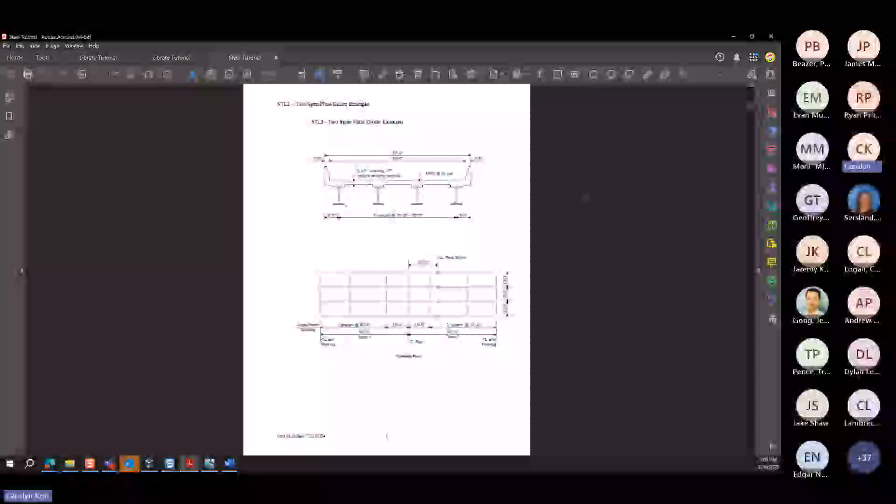Let me see. So I think that kind of covers the introduction here. Jeff, did you want to take over and talk about the libraries? Yeah, sure. Let me go ahead and share my screen.

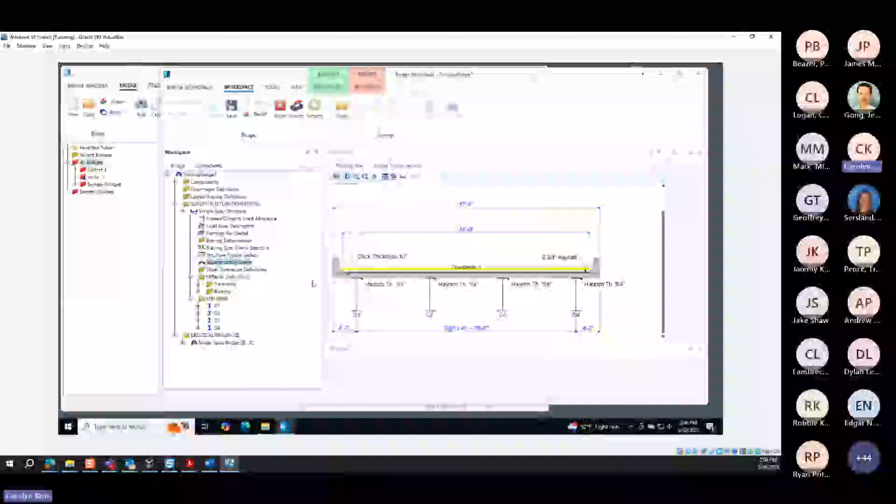So here we have stiffener definitions. Again, this is fairly straightforward, just defining stiffeners. Or if you have, let's say, prestress, you'll see shear reinforcements there. So there's our overall structure layout. So once we've got that part of it set up, this is where we'll come in and basically create the individual members.

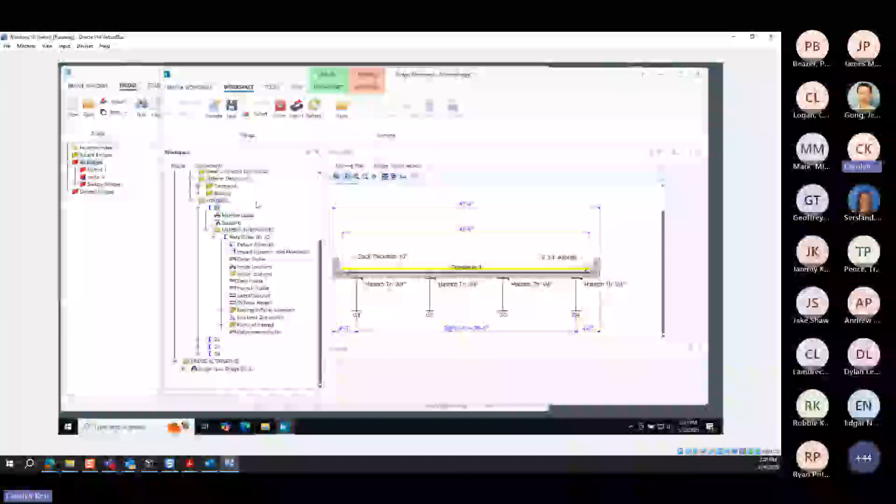Let me think here. I'll talk a little bit about what we've got here, and then I want to talk about member alternatives because that is a pretty important topic here. So when you go to create members, you can create different member alternatives.

So this G1, 2, 3, 4, these get set based on the number of girders that you've entered in this window. So when you're creating your superstructure and you set your number of girders here, that's what's going to determine how many girders show up further down the tree.

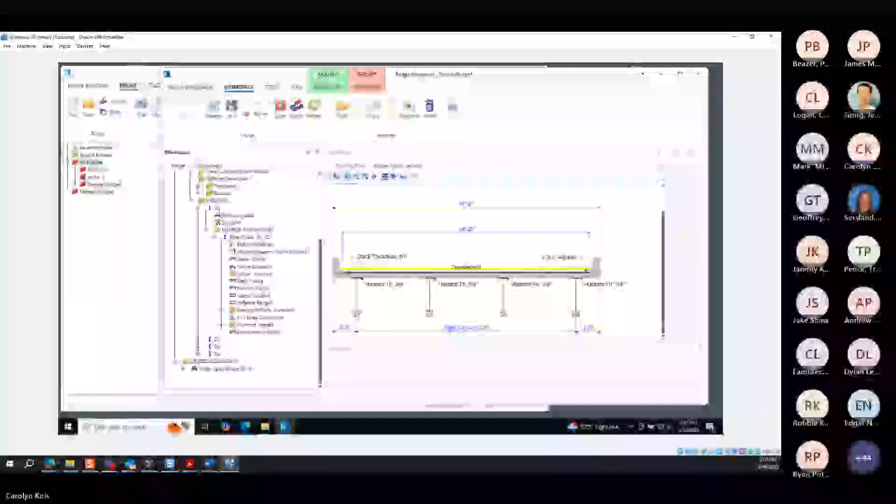So for each girder, we've got some loads here, and this will basically cover any kind of additional loads that aren't included in the components that we've already modeled. So for example, when we create the structure typical section here, the deck thickness that you enter here is used for the dead load. So that load is already going to be computed by the software.

Same with your appurtenances, parapets, wearing surface, all that kind of stuff. So if it's a component that you've entered here in your typical section, that will be used by the software to compute the dead loads on the structure.

This member loads here basically just allows you to enter any kind of additional or maybe unusual loads that aren't covered in the things that we've already defined here, or like the self weight of the girder, that we're going to enter down here. That also is used by the software to calculate the loads. So this would be for things like attached utilities, stay-in-place forms, other less common loads that aren't accounted for in the components that we're modeling.

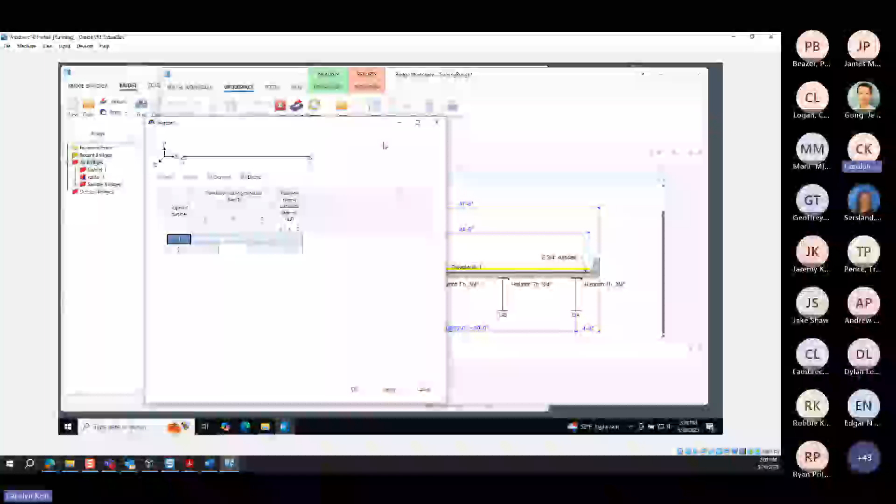And then here we've got support conditions. We've got the general or line girder supports that are used for a 2D finite element analysis versus 3D finite element analysis. We'll talk about this a little bit more when we get to analysis settings. But if you're working with a system model, a lot of times you're going to want to run a 2D finite element analysis. It's quick and it does the job for a lot of things. But you do have the option to run 3D analysis as well.

And if you do that, just make sure that your support conditions are set the way that you want them to be. A lot of bridges, especially a straight, normal bridge, are designed essentially as line girders. So when you create this 3D finite element model, support constraints that have a little bit too much fixity can cause some unusual results in a structure, depending on how the supports are set. So this is one of the things you'll want to look at if you are running a 3D analysis, to make sure that these support conditions are set the way that you intend them to be.

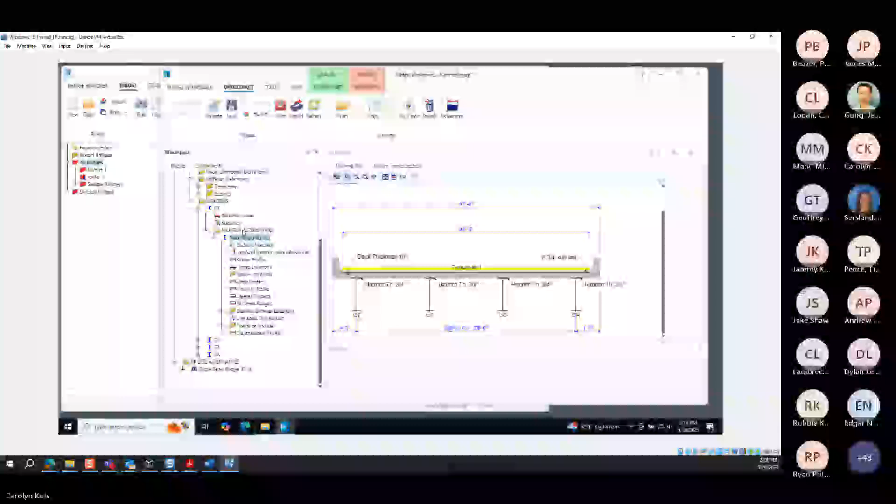Okay, so member alternatives. When we double click member alternatives, we have a bunch of different material types and girder shapes. Now, one thing that pretty much always tends to confuse people when they're getting familiar with the software is, what is the deal with member alternatives and bridge alternatives? Why do we need alternatives?

The short reason for this is basically that, if you're load rating a bridge, you're working with that one bridge. But this software is also used by departments of transportation and structure owners who might be working with thousands of bridges. If an agency has thousands of bridges in their inventory, and then they have 2, 3, 4 copies of different versions of structures for different bridges, that quickly becomes difficult to manage. So this allows you to keep different versions of things within that actual bridge.

So for example, when this bridge is new, let's say this girder gets modeled as the as-built girder. Everything's in good shape. There's no deterioration. Everything's the way it's supposed to be. Then, maybe years down the road, there's an inspection and they see some deterioration. Maybe there's a utility line attached to a girder, some other added loads, things like that. What the agency can do then is basically create a new alternative.

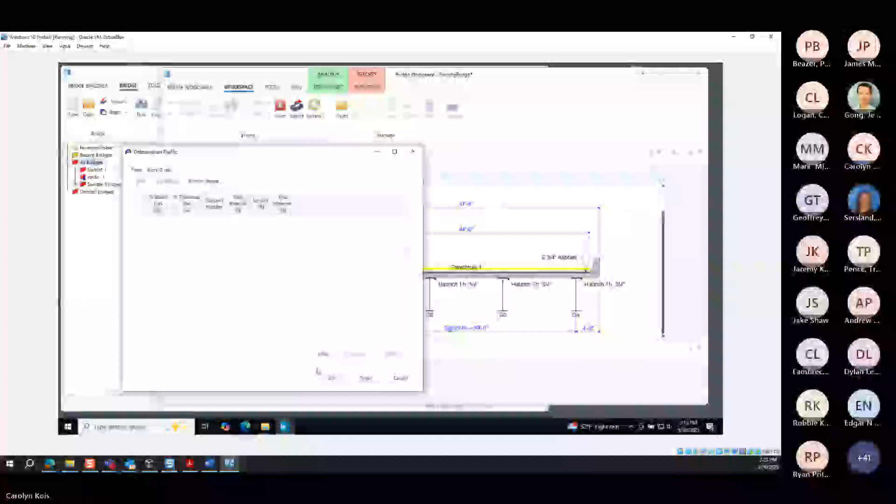And if I want to go in here, based on, let's say, the 2025 inspection, maybe there is some deterioration. Let's say we enter that here, say percent. All right. So this is basically the girder that we have now.

Now we've got two girders. So then what we want to do is go back into this girder, because remember the number of members that get set here comes from the superstructure definition. So this is like how many real girders are there in the bridge. There really are 4, even though there's 2 different versions of this one, right?

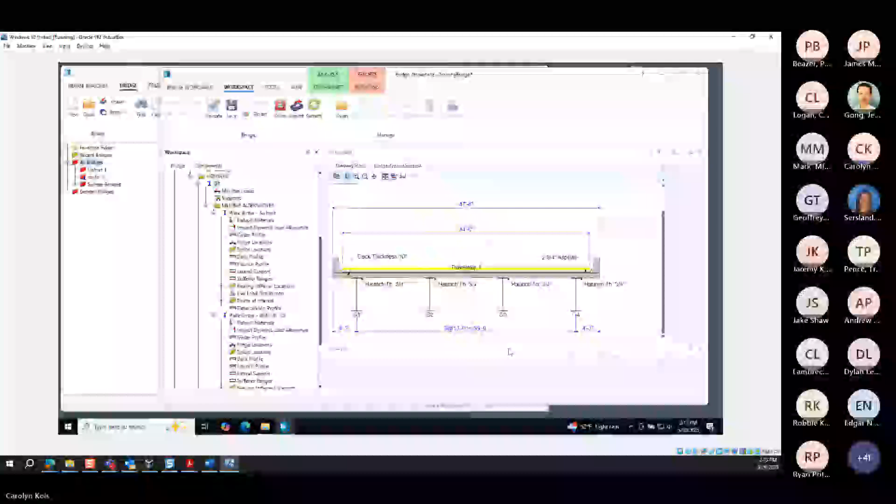So basically what we want to do is say, okay, this is the current one now. So we want to come in here, change this to existing and current, and then save this. The reason why this is important is when you run an analysis from, let's say, the superstructure definition level, it means that this girder is the one that's going to be included in that analysis, not this girder.

Same when you run a batch analysis from the Bridge Explorer. This is a pretty common thing, running batch analysis from the Bridge Explorer, if you have, let's say, a permit vehicle and you want to check, I don't know, these 3 bridges. I'm not gonna run an actual permit vehicle. Not a real permit vehicle, but that's okay. So this is gonna run this batch analysis from the Bridge Explorer.

Now, the way that this knows what to use within the bridge model are the elements that are set to existing and current. So that's why it is really the bridge alternative and member alternative. It can be a little counterintuitive at first, but it is super important, because when you're doing batch analysis and permit analysis, you want to make sure that the real, current version of what's out there in that bridge is marked as existing and current, to make sure that that's the member that gets evaluated.

So you'll see here after I ran this batch analysis, it's showing the structures and the components that were evaluated. And this shows that this plate girder 2025 is the one that was included. This is the one that I just modified in that bridge workspace and put that deterioration in. So if I'm running a permit truck right now, it's using the current, real version of that girder. So that is important.

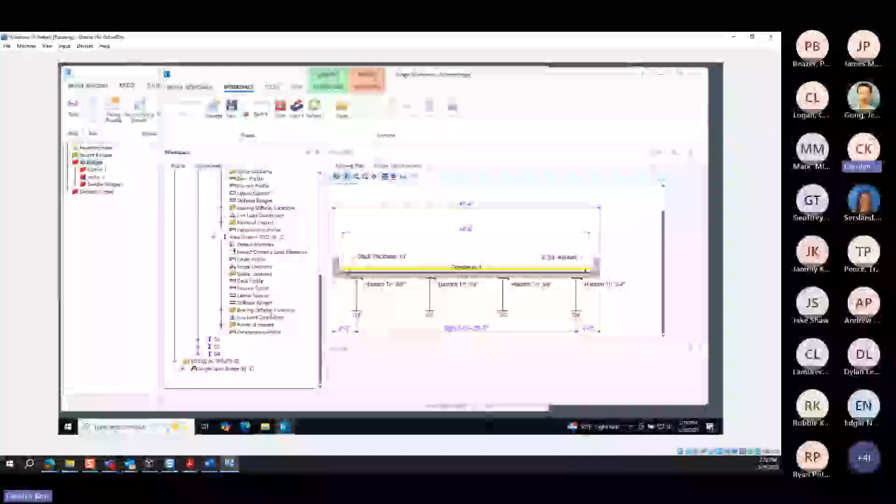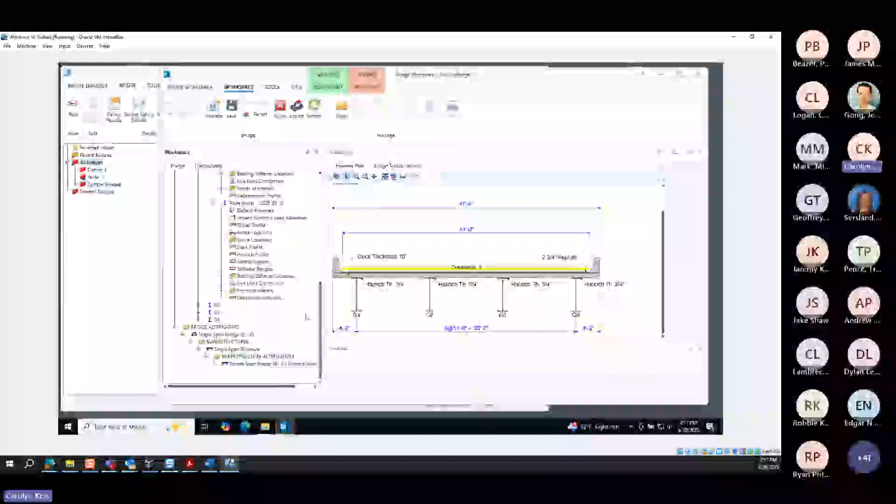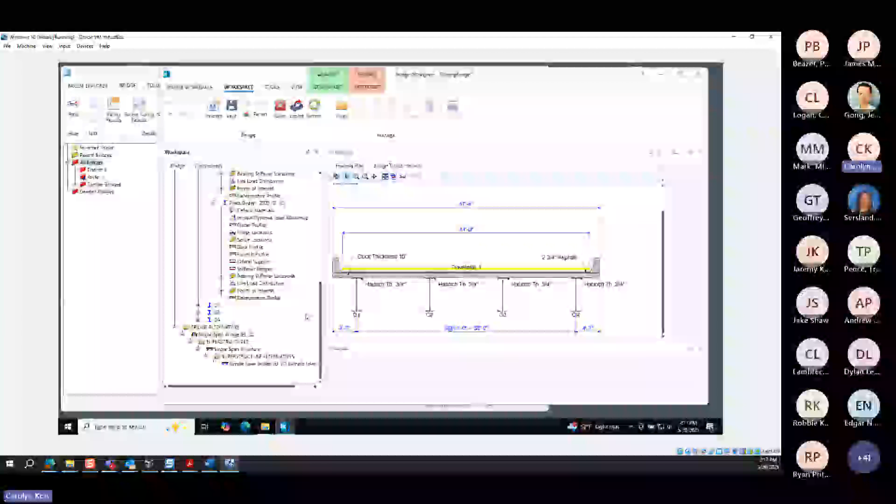There's a little bit more to talk about here with the actual plate girder and the girder itself. But since I'm on the topic of alternatives, I want to mention it's a similar idea for bridge alternatives. If you're attending the next couple of virtual trainings, we will be touching back on the concept of bridge alternatives and member alternatives a few times, because almost everyone who starts working with the software finds this a little counterintuitive at first, but it is a really powerful, valuable feature to structure owners.

Just like you can have a couple of different member alternatives, but there's really only one real existing current one, it's the same thing with bridge alternatives. So under superstructure definitions, I can have another superstructure definition. Let's say I was looking at a structure where I was considering a structure replacement or something like that.

You can have a couple of different bridges within that superstructure. But regardless of how many are here, even if you only have one, you will need to come in and create this bridge alternative. And this is what tells the software what should actually be included when you're doing that analysis. And so this is where you'll see here, this is showing existing and current superstructure. And so that's this simple span structure here.

So for example, let's say a DOT was looking at a roadway repaving and you want to check if adding a couple of inches of wearing surface is going to end up restricting your bridge. Maybe you create a new superstructure definition to evaluate that, but you don't want that to be the structure that's used for permitting because it's not currently out there yet. You can still have that alternative in here because it's something that you want to check and look at, but it's not the one that's saved to the bridge alternative, meaning that it won't be the one that's used when you're running a permit analysis or something like that.

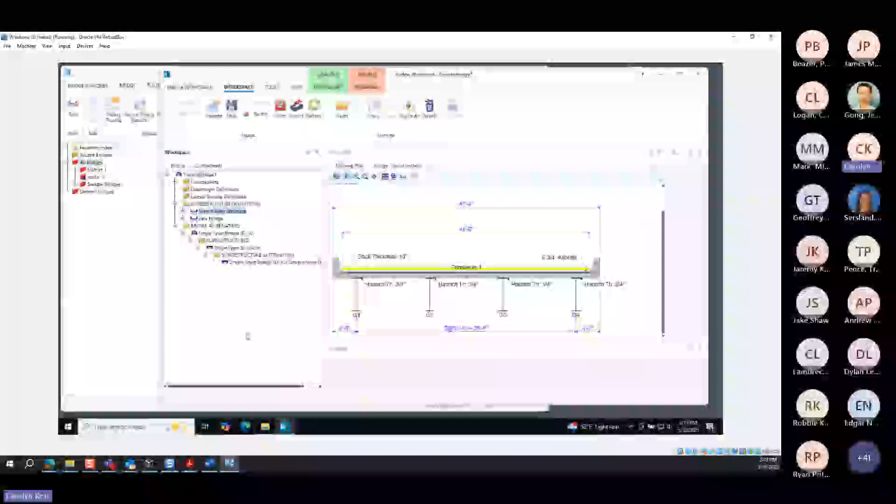So again, I know it's kind of quickly going over a lot of information there. We will be revisiting that through the next couple of training courses as well. Let's see here. Just to briefly go back to a few more things about the actual member alternatives. So once you've created a member alternative here, I'm going to switch this back.

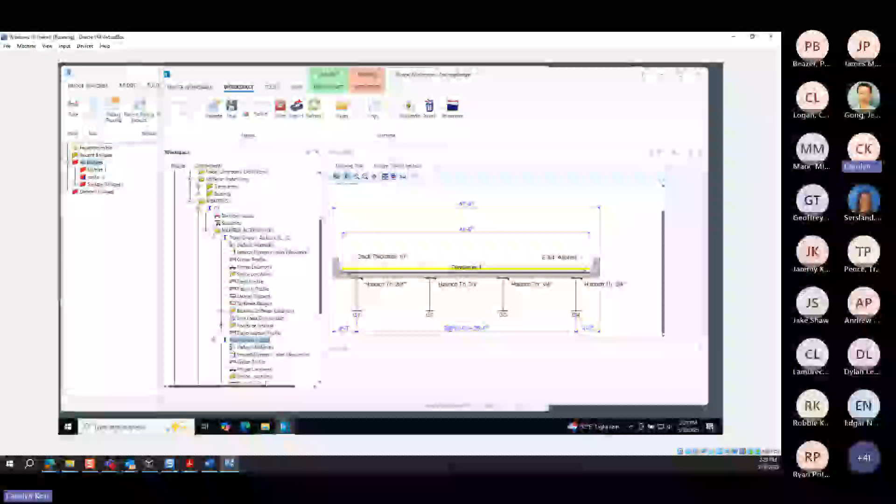So I just want to get rid of this one here. Basically, if this is marked as your existing current, it won't let you delete it. So what I did here was I just switched it back to this first one. Now that means I'm going to be able to delete this one. All right, got rid of that. So this is where basically you'll create a girder. We do have spec overrides here as well, factors, engine. Again, you won't really need to do much with engine stuff.

One thing to note is control options. These are basically analysis options that'll allow the engineer to make determinations on, let's say, where different analysis points are generated, or some different analysis methods or options that may be applicable to certain structures, maybe not to others. We'll be talking about the Iowa DOT template models in the third virtual training. But again, if your agency has policies or preferences on which things they want allowed or not allowed, always make sure to check on that. There probably won't be a whole lot that you have to change in here, but there are things in here that are worth reviewing, worth considering when you're doing your load rating analysis.

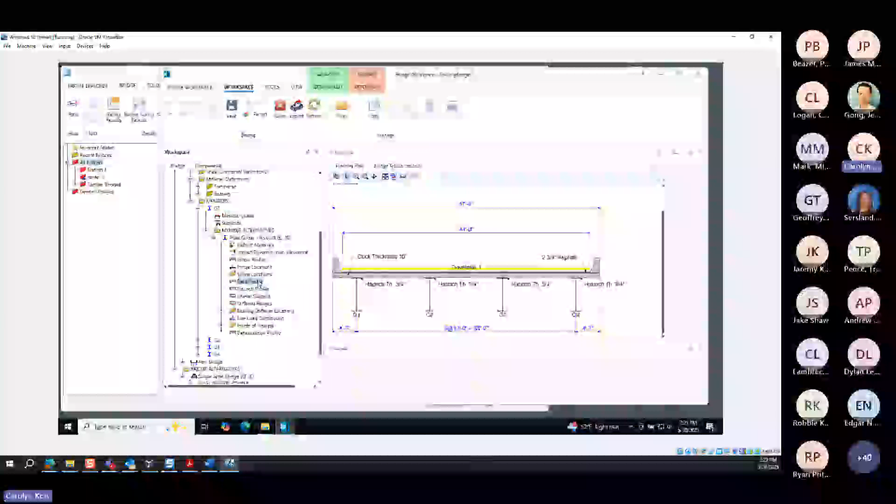Deck. One thing I do want to note here on the deck profile tab. Earlier, we set up the structure typical section, and this is where we enter the width and we put a deck thickness here. So this is the deck thickness that's used for dead load. In the deck profile here, this is the deck thickness that's going to be used for structural properties for a composite beam. So right here I'm just going to click compute from typical section, enter structural thickness to use.

I'm going to go ahead and use that same thickness as structural thickness, but sometimes you'll maybe want to consider, sometimes they'll have the first half inch of the deck not effective for structural thickness, so let's say you want to do 9.5 here instead of 10, or something like that. This will be the structural thickness that's used for the composite section. So let's see.

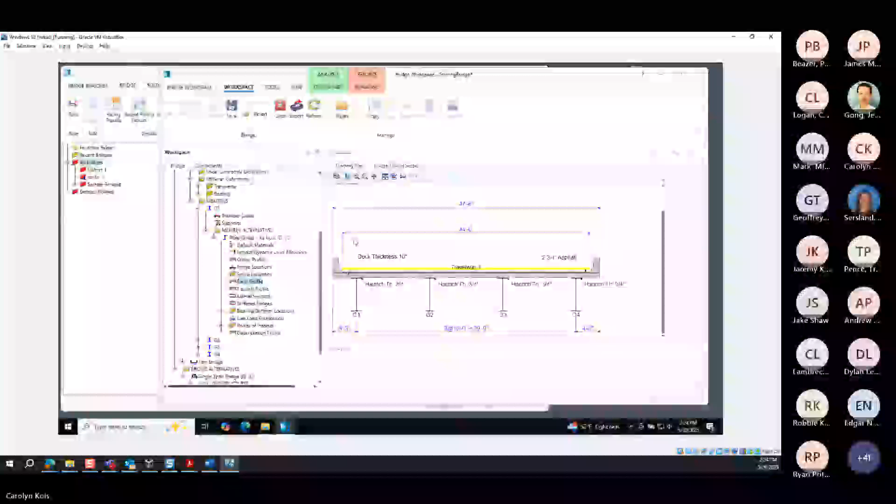What was the other thing I was going to touch on here? Haunch profile. Again, this is basically used in the offset between the beam and the deck when it's computing the composite section. You can define your lateral support ranges and locations, stiffeners, bearing stiffeners, and then live load distribution here.

So the live load distribution, when you first create the bridge, these are going to be blank. And you can run the analysis even if these are blank. They'll just be computed at runtime. Or you can compute them in this window and save them. I think that with the Iowa DOT models, they're being computed at runtime.

But if you ever do want to look at the distribution that's being computed here, you can do compute from the typical section, and then you can do view calcs, and you can see a report here that'll come up that shows you the values that it's using and the way that it's computing those distribution factors. So there's a bunch of information about that there.

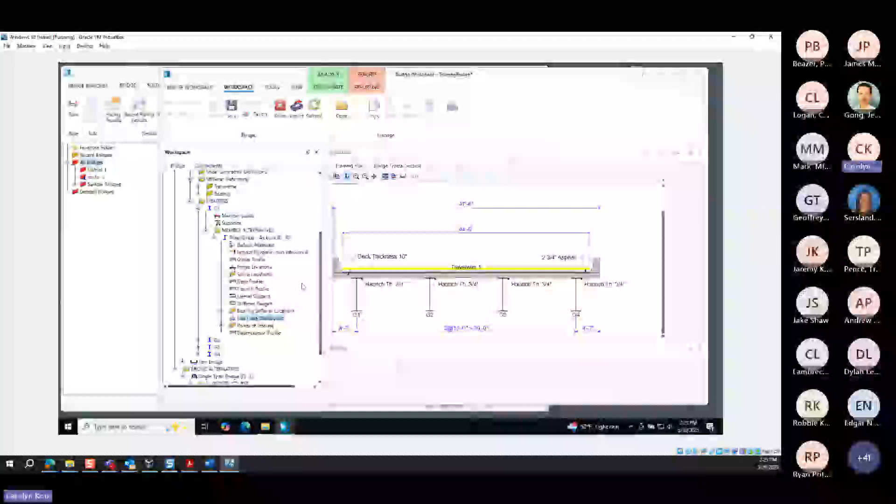And then you can also manually override it. So these are the AASHTO computed values, but if for some reason I make the engineering determination that this should be something different, I can enter the values that I want it to use and save those. I'll recompute that. And then let's see, only a couple things left here.

So points of interest, this kind of allows you to specify individual points if you do need to do, let's say, a capacity override, something like that. We're not going to go into that in a ton of depth here today, but there are ways that you can pick a specific point on the structure and override the capacity or something if you need to do that. And then, like we said, deterioration profile, where you can enter deterioration for that member.

Let's see. One other thing to note is that you can copy and paste here. So once I've set up one of these girders, if I want to copy this and then just paste it into the rest of these girders here, you can do that. You don't have to define each one individually. It's just right click, copy, right click, paste. So that can help to save a lot of time.

And again, even if, let's say, you create that edge girder, copy paste it, then once it's copied, you can change anything that needs to be changed about it. It's just a separate copy at that point.

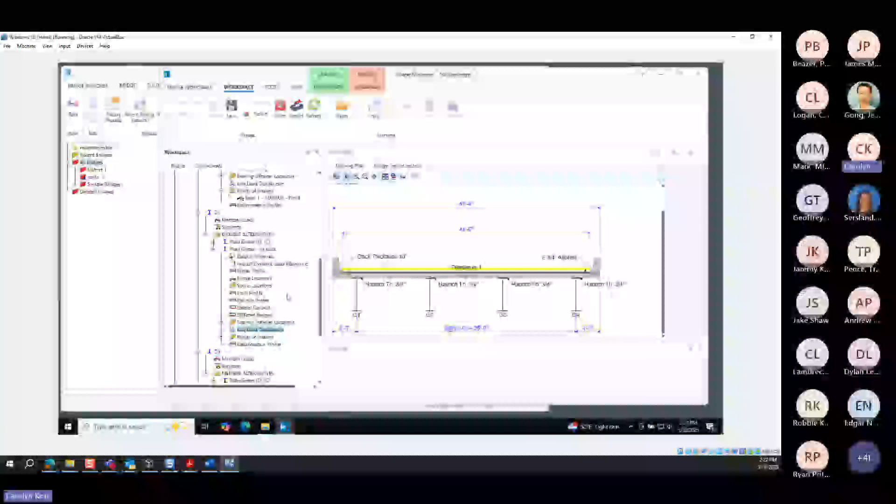One thing to note is that if you have computed distribution factors before you copy it, those factors will be copied as well. So if you're copying a girder that's, let's say, an exterior girder, and then you paste that into this here, an interior girder, it's probably going to have different distribution factors. So you'll probably want to go in and recompute those. That's, I guess, the one thing to point out there. Let's see, what else do we have here?

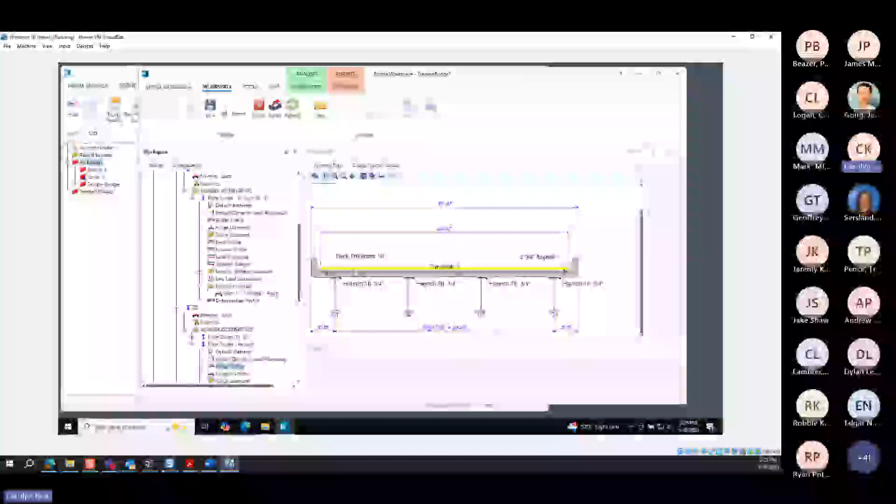Okay, so for this, we don't have schematics on this bridge. Why is that? A lot of it depends. Sometimes for schedule or cross section based, there are a few things where we won't have the profile schematic. I'll show you when we look at this other bridge. There are a lot of times there will be a girder profile schematic here too that you can right click and open. Yeah, if it's cross-section based, we don't have schematics for that, I think.

Just schedule based. So yeah, and this is just this training bridge here that I kind of randomly picked. So this one just happens to not have that. But I think most of what you will be working with is schedule based, and so those should have those cross sections. Is this schedule based? That's not right. Hold on. Okay. Anyways, yeah. A few types we don't have them. A lot of them we do.

Okay, so that's where we've kind of got the bridge set up, defined, and then the bridge alternative. And like I said, we'll be kind of reiterating and revisiting

Oh, I see in the chat. Thank you.

I was clicking the wrong place. There we go. There we've got our plate girder schematic.

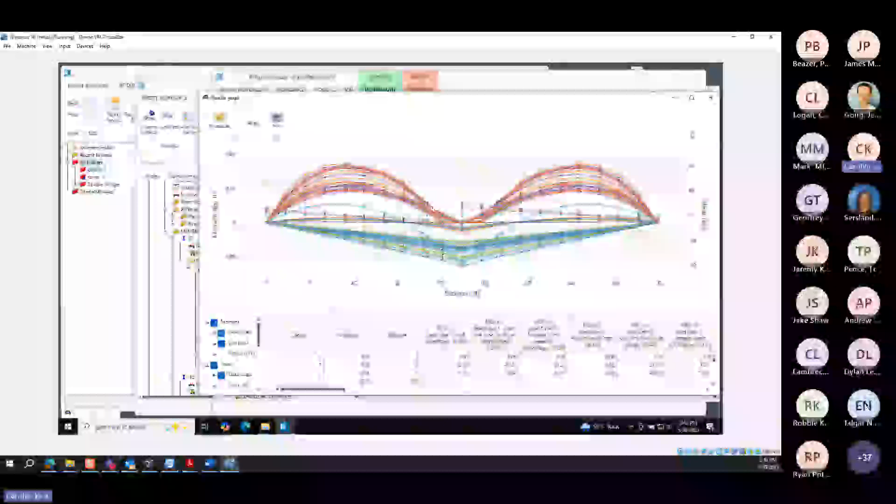Okay, so I know we're kind of running up towards the end of our time here. And we'll kind of touch back on some of this stuff because it's a lot to sort of put out there all at once. So we will open it up to questions for anyone who's had a chance to kind of work through that Steel 1 tutorial. But before we do that, I want to talk about help and methods of solution and where you can find some more information about things.

So we just talked about here, once you run this analysis, right up here, there's a few places you can get a lot of information about what the program's doing, the information that it's using, all of this kind of stuff. However, there's a few other things that are really important. So one thing is when you're working your way through things here, sometimes you might come up to a window where it's asking you for a value and you're like, well, this could mean this or it could mean something else.

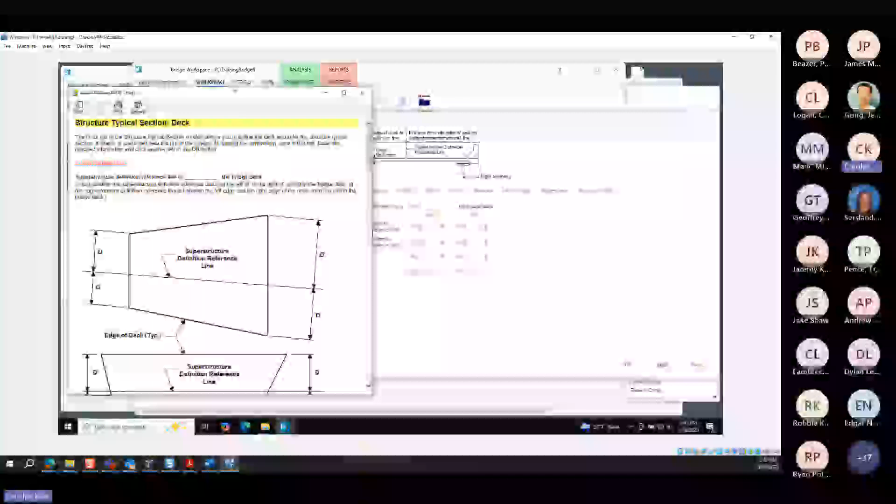But the point is here that from any window that you're in in the software, you can click the F1 key and it'll pop up a menu and it'll tell you more information about what this window is actually asking for. So this is in the structure typical section. I hit the F1 key and this help menu pops up. And so this is showing you, like, when you see here, superstructure definition reference line is within the bridge deck, you might not know exactly what that means.

And so that F1 help key will provide you with some more information about what this window is actually looking for. So that's usually a really good place to start as you're getting familiar with the software and setting up your bridge model. This will tell you a little bit more about exactly what information it's looking for and how it's used.

Again, some of these topics have more information than others, but pretty much every window in the program will have this. And for some, like let's say this beam detail, so this is what I was looking for with the pre-stress. So these beam projection details for simple span, it's fairly straightforward as far as center of bearing to end of beam.

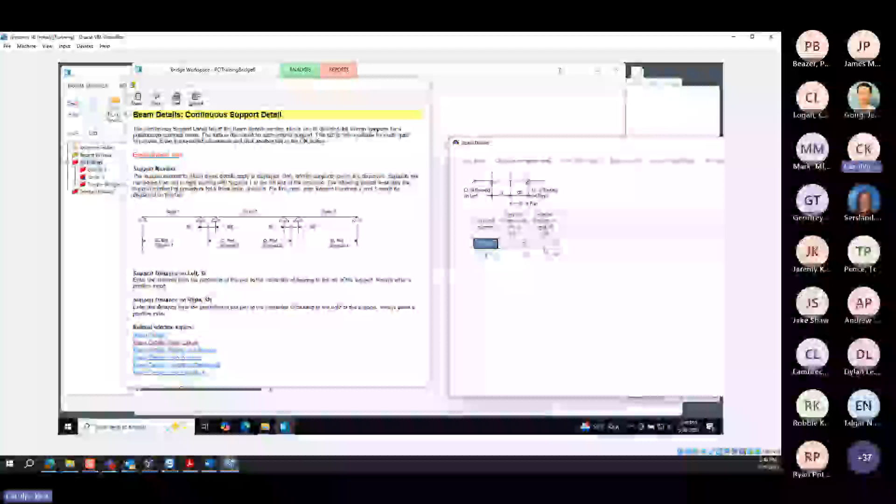But when you have pre-stress, if you have a bridge that's single span for dead load and continuous for live load, the way that all of those beam ends line up, if you look just at that window, it might not be super obvious what it's actually looking for. Now we do have some schematics that sort of explain it, but again, this F1 help menu will usually provide you with more information about what's there. So that's always a good starting point.

Another thing to mention is the methods of solution. So in version 7.6, we added basically a help ribbon up here, which makes it a little easier to find all this stuff together. But in version 7.5 and prior, you can get to those methods of solution when you're within the bridge model itself: click bridge workspace, and then you'll see this help here. And these are all the different AASHTO engines, the engine for different structure types.

So let's say I go AASHTO LFR, method of solution. I can double click this and it'll open this PDF document, which is a big long document that basically goes through all of the analysis the software does and how it builds models and any kind of assumptions and stuff that are within that analysis.

And so you'll see information here about, again, just kind of how it actually builds the finite element models, the logic behind that. So if you're ever, even after you've looked at the spec check output detail, not sure about something the software might be doing, there's a lot of information here in these methods of solution. There's also flowcharts in here for the specification checking that it does.

And so, like I said, these methods of solution are available for different structure types and engines within the software. So like LFR, LRFR, timber, trusses, culverts, a whole bunch of different ones here. So this is the culvert one, for example. It's showing how it does load distribution, and a whole bunch of other things. So that is another really important resource.

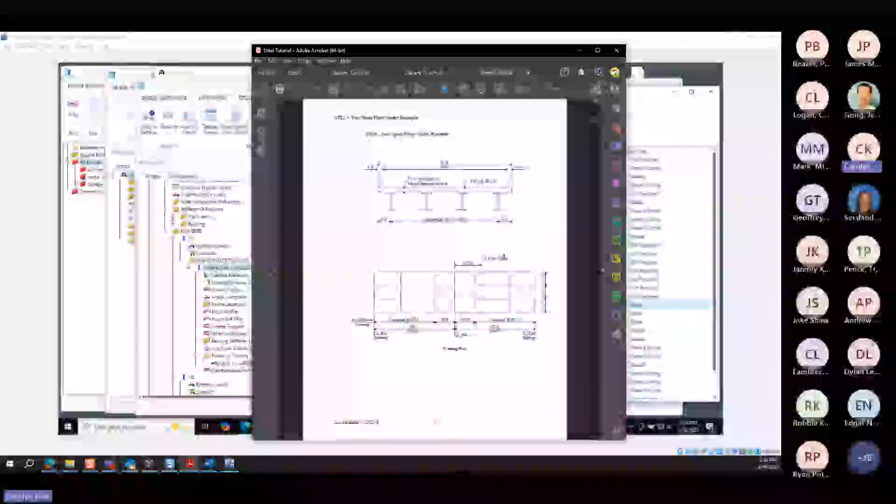The one, I guess, kind of last thing here I wanted to just talk briefly about is the steel tutorial. So when we sent out the info for this virtual training, we sent the PDF for this steel tutorial. Now, I know we did activate the licenses somewhat recently, so some of you may not have had time to work through the tutorial yet. For any of you who have, we can certainly stay on for a little bit here and answer any questions

that you may have. If you have not had a chance to work through this, I would strongly encourage you to go ahead and do that. And we can also answer any questions in the next training as well, just if anyone hasn't had a chance to yet. With that being said, though, if anyone has worked through this and does have any questions for us about that or anything else, do we have any questions in the chat on anything we haven't addressed? I'm just checking the chat here. We've covered all the ones that have been asked. Okay.

Alrighty. Well, let's see. I think that pretty much covers a lot of what we wanted to cover here today. If anyone else has anything they want to add, we can certainly do that. Like I said, we hope that if you're planning on attending the next couple of trainings, you want to work through this tutorial as well as the others. So the next training is going to be culverts, so it would be good to work through those tutorials before the training if possible. But again, we'll be covering the things that are in those.